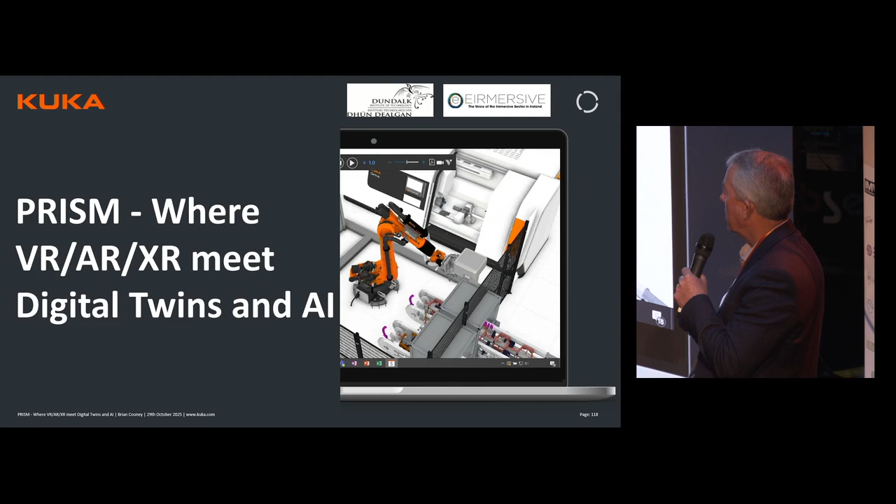So, I'm a local lad, born and bred in Dundalk. In fact, I served my time originally in the building to the left of the studio here in PJ Carroll's tobacco manufacturing company. And then I came to DKIT to study mechanical engineering. I've been in mechanical engineering for 40 years, automation, specifically robotics, for the last 30 years, having set up and ran the robotics business for ABB, and then in 2014, setting up and running for Kuka Robotics.

I'm passionate about manufacturing, and for that reason alone, I sit on a number of boards, including the IBEC Industries Board, the Irish Manufacturing Research Industry Steering Committee, the AMTCE, which is the Advanced Manufacturing Training Centre of Excellence, where I sit on the Board of Governance, and I also sit on the NSAI Robotics Steering Group.

So, a little bit about Kuka. The company is more than 125 years old, so you can imagine it's not 125 years making robots. In fact, it's 1973 when Kuka made the first industrial robot on a commission from Volkswagen. 15,000 people worldwide, more than 50 different countries, 100 different locations. It's about a 4 billion euro company, so it's reasonably large. It's made up of 5 different pillars.

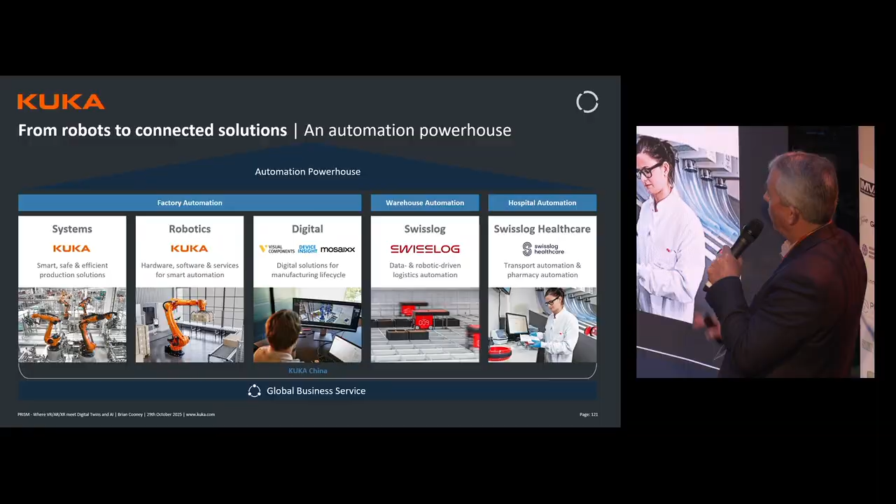One specific pillar we're going to talk about later on, but the robotics pillar is the one that I work for. What we do is we supply the robotics software and hardware to our system integrators, system partners, and machine builders in each of the countries that we operate in. We also have a systems business, but that operates at a very large level. Timmy may already be aware of it because Volvo are a customer of ours, but this is where we will build entire automotive lines or aerospace lines or nuclear systems or modular house building and so on. These are typically systems that run from about 10 million up to several hundred million.

We have the digital pillar, and this is what we're going to talk about in the next series of slides, with visual components, Device Insight, and Mosaixx. And then specifically in warehouse and hospital automation, we have Swisslog. Swisslog do distribution centers, logistics centers, but they also do transportation systems and pharmacy dispensing systems within the hospital environments.

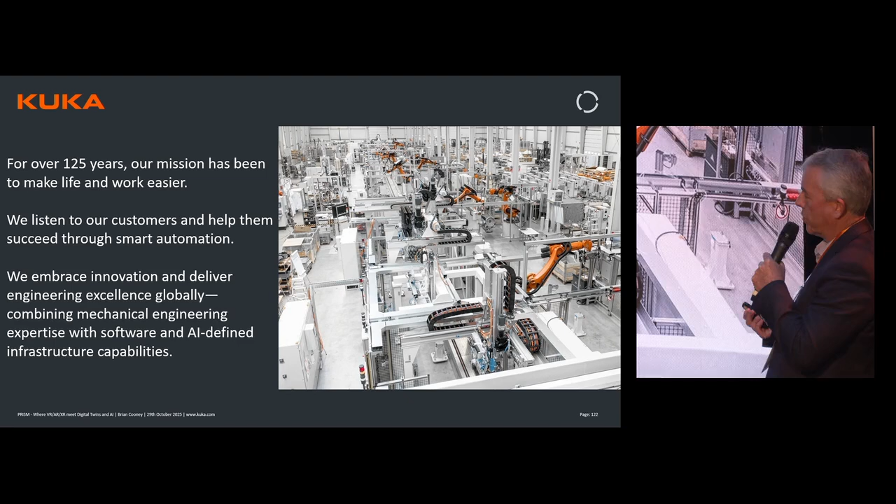As I mentioned, we're over 125 years old, but it's the bottom paragraph that really captures what we do. We embrace innovation and deliver engineering excellence globally, combining mechanical engineering expertise with software and AI-defined infrastructure capabilities. When I joined the company, or even 20, 30 years ago, Kuka would have been known as a mechanical engineering company. Nowadays, it's very much known as a software and AI company with a mechanical element to it.

And this is the start of it. When we talk about our digital sphere, we're talking about the applications around the robot: application software, simulation, our knowledge databases, remote service, device connectors for the various different machines. But a lot of this is platform independent. We have Mosaixx, which is collaborative planning software. It's independent, so we can interface and collaborate with multiple different third-party vendors, the likes of Dassault Systems or Siemens PLM and so on.

Visual components is when we're talking about entire factory design, so digital twins of entire factory layouts and plants. Kuka is when we're talking about Kuka Sim and Kuka Sim Pro, again about either cells or factory layout, or virtual commissioning and offline programming.

And then we have our device insight, which is around the actual operation of the factory. This is where we can digitally connect all the robots and machines. We can pull all the data from them that influences the machines of the future, the robots of the future. It allows us to do predictive maintenance. It allows us to calculate the energy that we're using through the machines and how to improve on that.

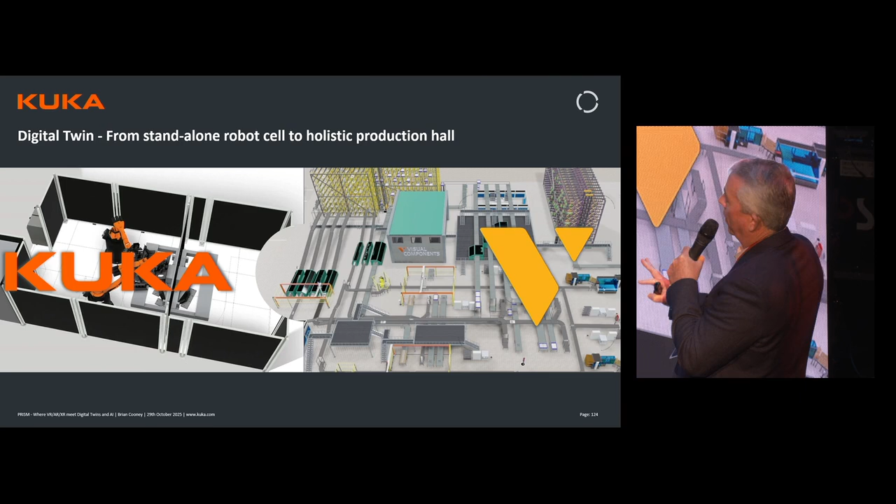Now, when we talk about digital twins specifically, we're talking about the KUKA.Sim and we're talking about cellular type design. So we can take robot cells, we can design them up, and then on the Visual Components side, we can design the entire plant. So we can build those two together, but they are compatible with each other.

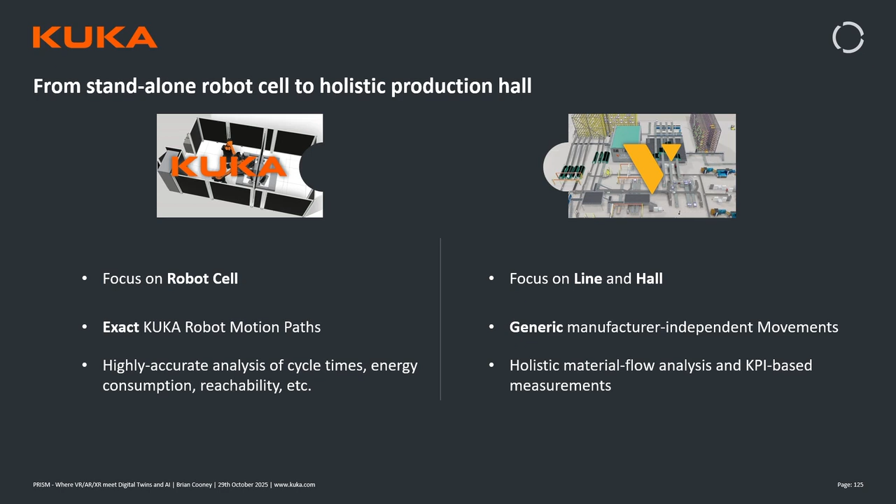The KUKA.Sim side focuses on the robot cell. We can calculate out our exact motion paths. It's very accurate. It's using a virtual controller, so it's not close or thereabouts. It's exactly what you're going to get in the real world. It allows us to calculate the energy consumption, reachability, and so on, the functionality of the cell.

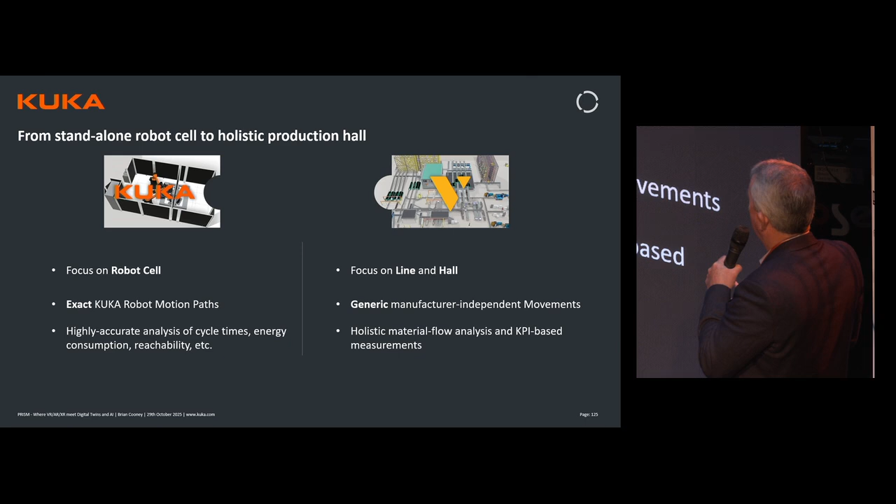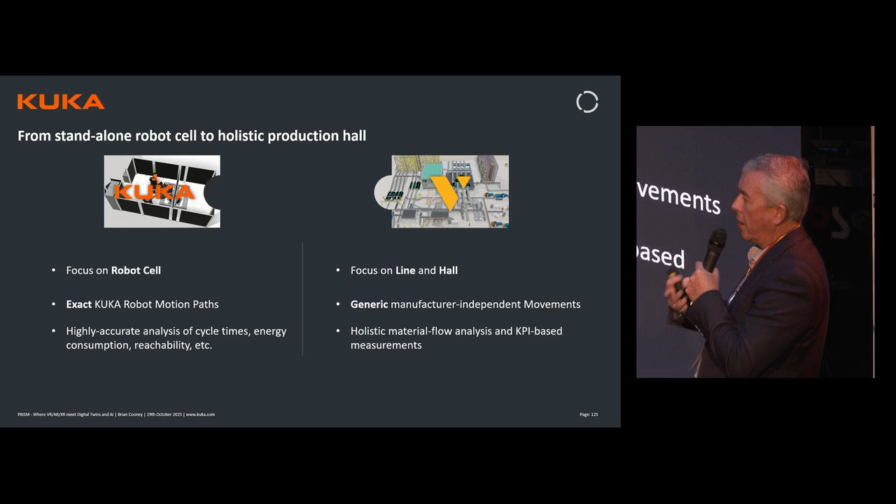The Visual Components allows us to focus on the production hall, the generic manufacturing. So we can pull in other machines. You can pull in injection molding machines, you can pull in presses, conveyors, etc. And we can calculate the times around all of those machines and then allow them to interact with the robot cells as well. So that allows us to have a holistic material flow analysis and KPI-based measurements and targets.

But why? What does it all do? So what it does actually is it allows us to save planning time. So from initial concept through to final design, we can reduce the time that it takes to actually design the concept and build the final solution around it. It allows us to check the feasibility and the viability and verify digitally what the machine is going to look like when it actually hits the factory floor.

It allows us to calculate what a change upstream or downstream will make on the entire process. And eventually, what that means is it drives up revenue and it reduces our costs. If we can take a machine or a plant layout and we can verify it digitally before it's ever cut or before it's ever made into the real world, on an automotive line, we can take 6 months out of the delivery of a line. And that is a huge amount of revenue. And then we're using extended functionality such as modeling, connectivity, arc welding, amongst others.

There are various different toolkits that we use around the digital twins. We have the KUKA.Sim for the 3D simulation and offline programming. We have WorkVisual, which allows us to configure the controllers and the machine data, online connections to the robot controllers. And then we have OfficeLite, which allows us to do the simulation of the real robot controllers and the offline programming and virtual commissioning. So that all allows us to enable a seamless workflow really between the virtual and the real world, your digital twin.

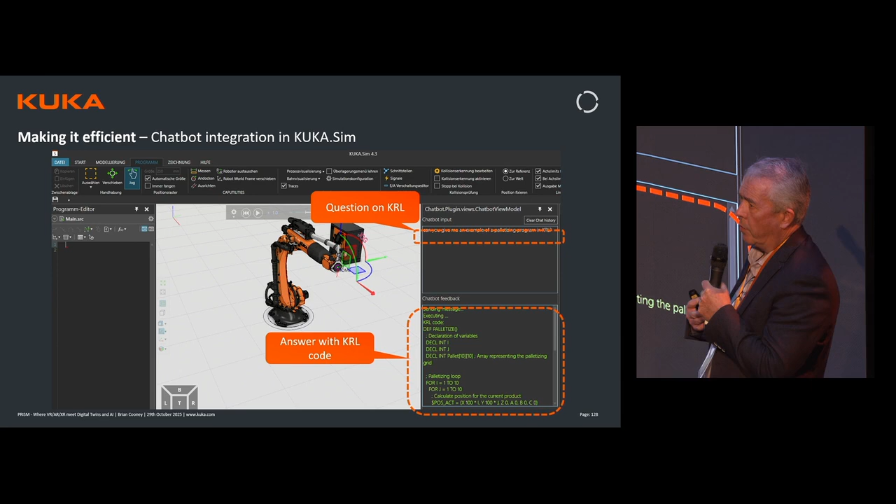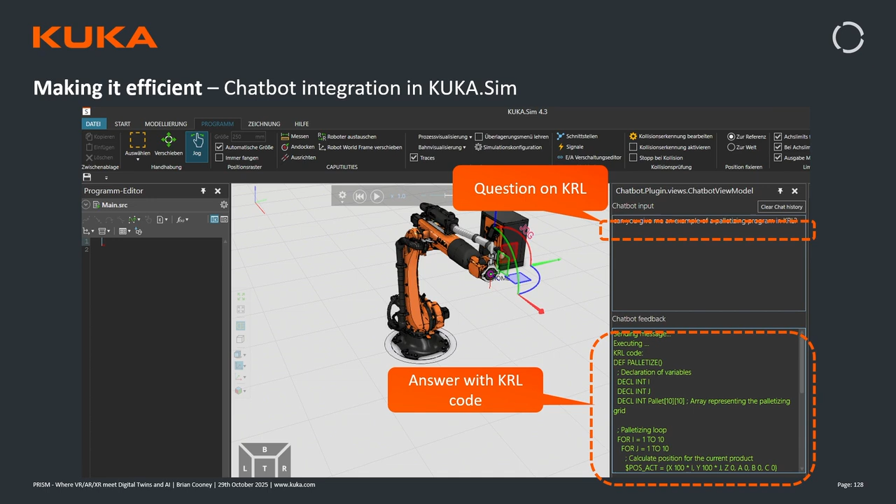If we take the AI element into it, when we're talking about robot programming, you're talking about coding, but we're trying to get away from that. So using AI, we can use chatbot functionalities. So we can tell the robot what we want to do. If it's a very simple application like palletizing, let's say we're building a pallet of boxes of butter, and we want to build a grid layer of 6x3.

We can tell the robot what we want to do. We can give it the dimensions in a chatbot and tell it that we want to do a layer of 6x3. We want to have 6 layers high, and we want to have interleaves between it. And it will generate it. So we're getting to the point of low code, no code programming for robotics.

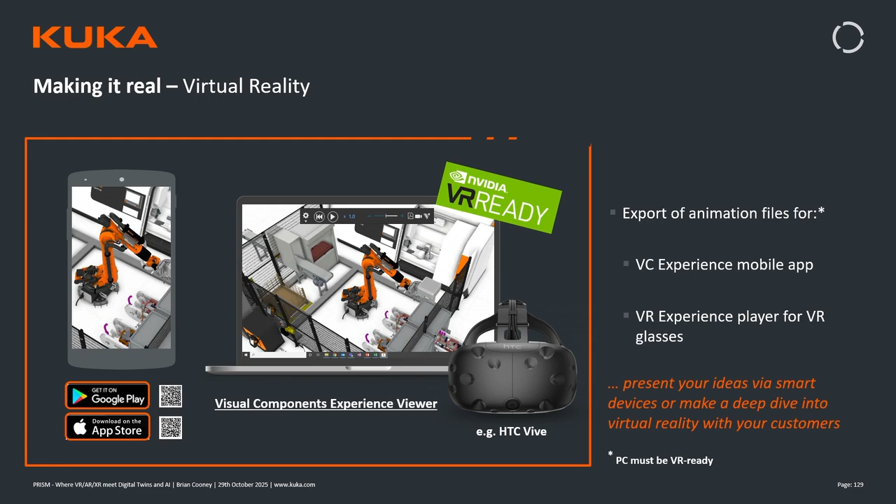We can export it to VR. So again, in terms of a lot of what we've seen already, if you're walking around the factory in the real world, you can see where all the problems exist. If you've already designed it digitally and you can export it to VR, you can now walk around your factory before it gets delivered. You can see exactly where problems might crop up or might already exist.

You can check it for the ergonomics of the machinery that you're building and designing. And you can use it as a tool, because a lot of these lines take a year, 2, 3 years to actually deliver. So you can use it as a training tool for your staff as well. So they can actually virtually walk around like the DAA example. So you can actually walk around the shop floor before it becomes a real shop floor.

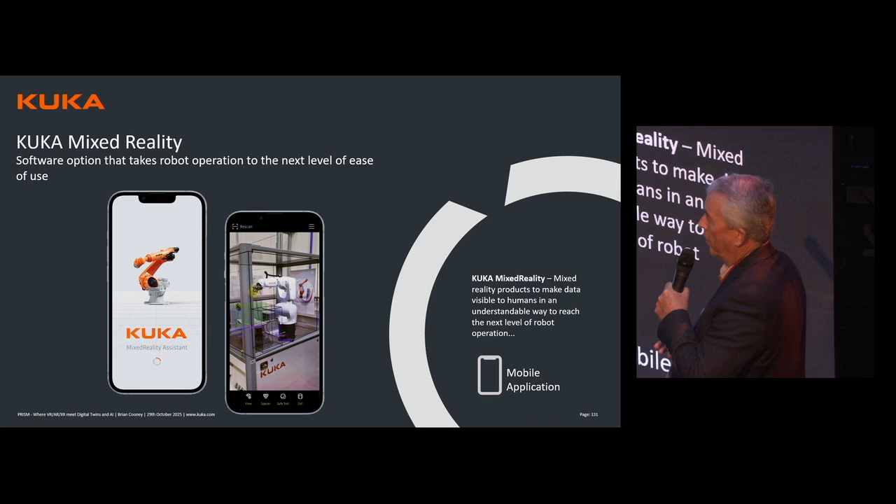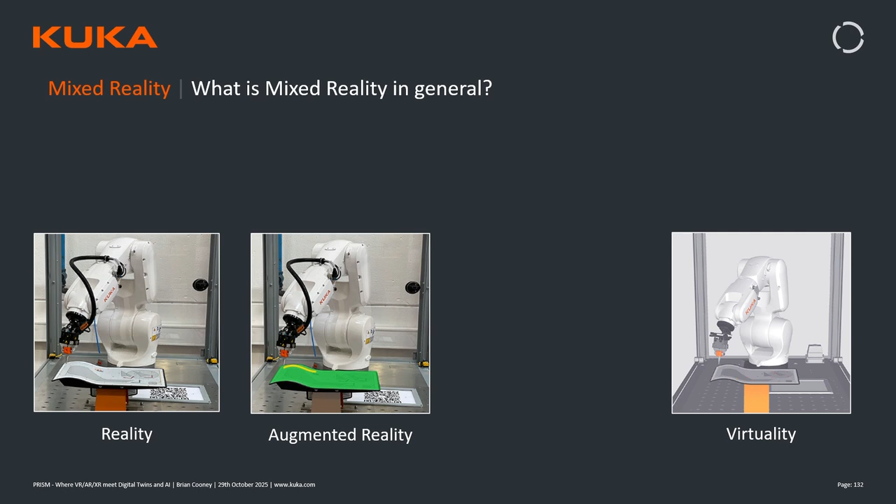And we have mixed reality. So Mark gave a very good, concise description of what mixed reality is, and that effectively covers what I'm saying here as well. So you actually have reality, then you have augmented reality, you have your virtual world, and you have augmented virtual world, which gives us extended and mixed reality.

Now, why would we use that? There are multiple reasons why we would use it, but one reason is around safety. So obviously the safety of the human in the loop is of paramount importance. It's the most important thing with any machine design, but particularly around robotic machine design. And what that allows us to do is to create virtual zones around certain elements of the robot cell, whether it be the tooling or even external components within the robot cell. So it could be the machine that we're interfacing with. It could be an injection molding machine, or it could be a laser marker or whatever.

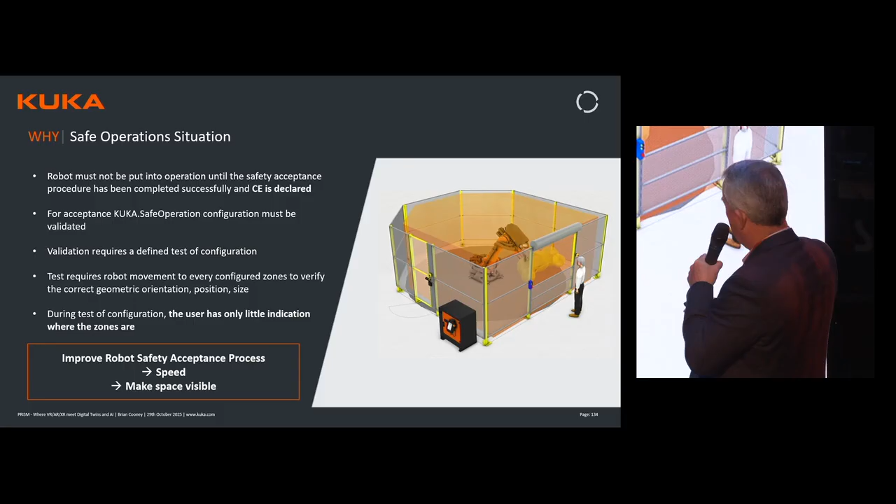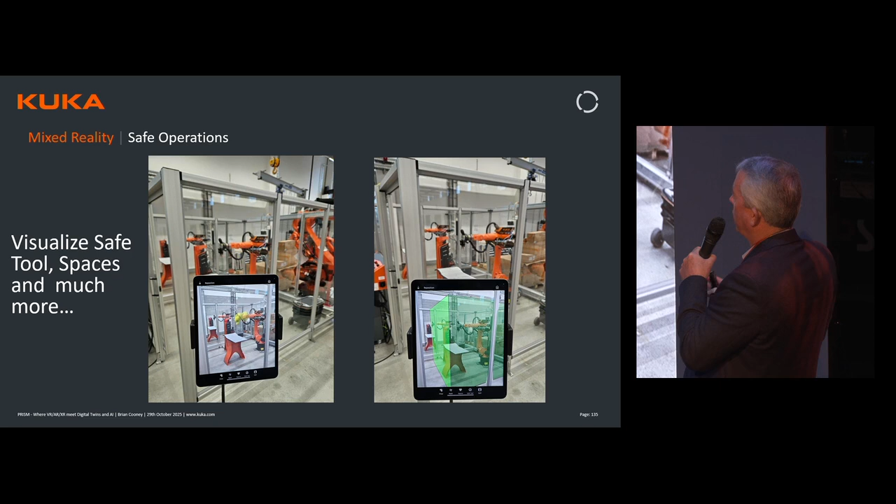But these are all expensive pieces of equipment. We don't want to damage them either. The human takes priority, but we don't want to damage the robot. We don't want to damage the equipment. So we can build all these virtual safety zones around it. And then we can export that into the mixed reality, and we can take it on our handheld devices and walk around the shop floor where we're going to be putting this robot cell. In this case, it's a virtual robot cell until we get the approvals on it, but we can check out all the various different safety elements around that.

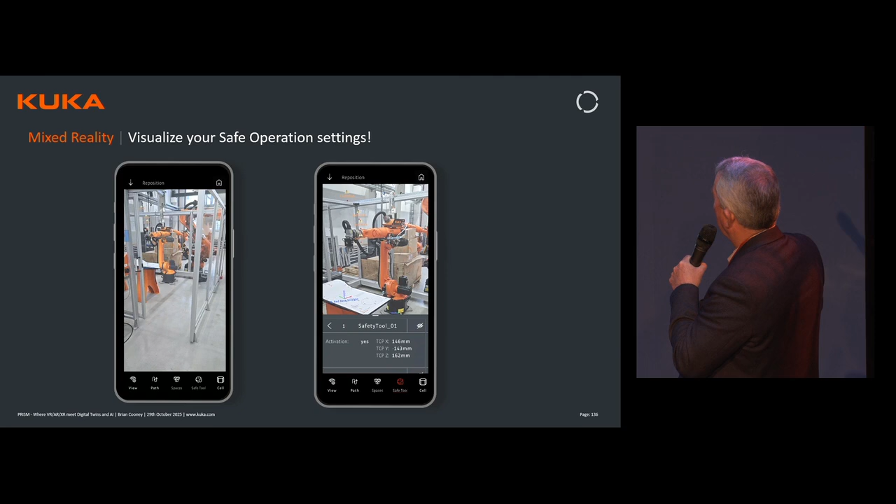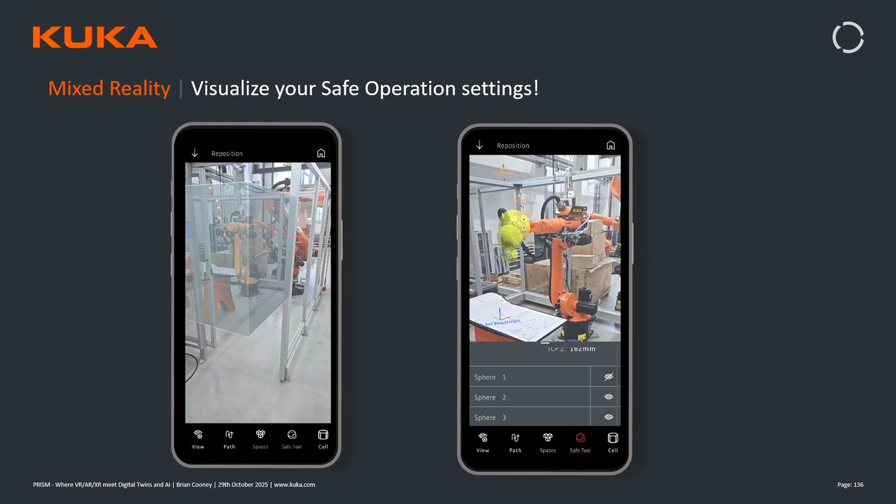This is just an example of when it's working through it. It's just going through the various codes. You see the various different spheres that are showing on the robots. But these are virtual cells that are being built up. And they're overlaid on the shop floor as you're walking through it.

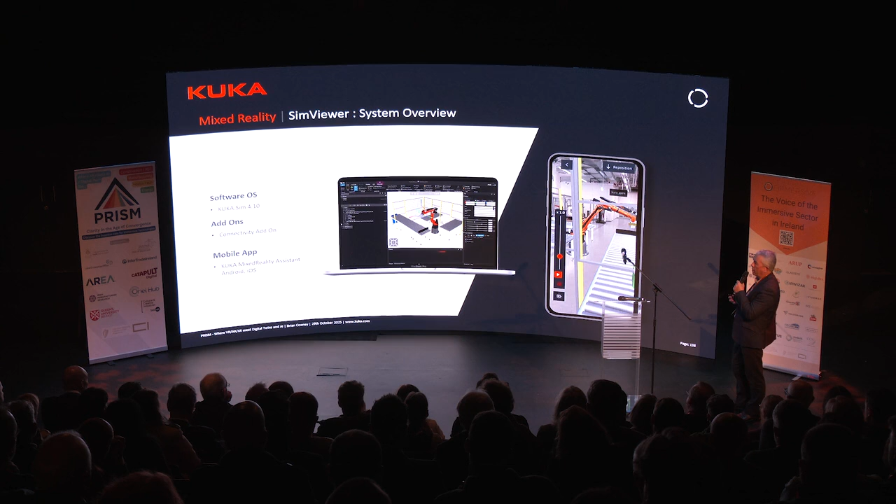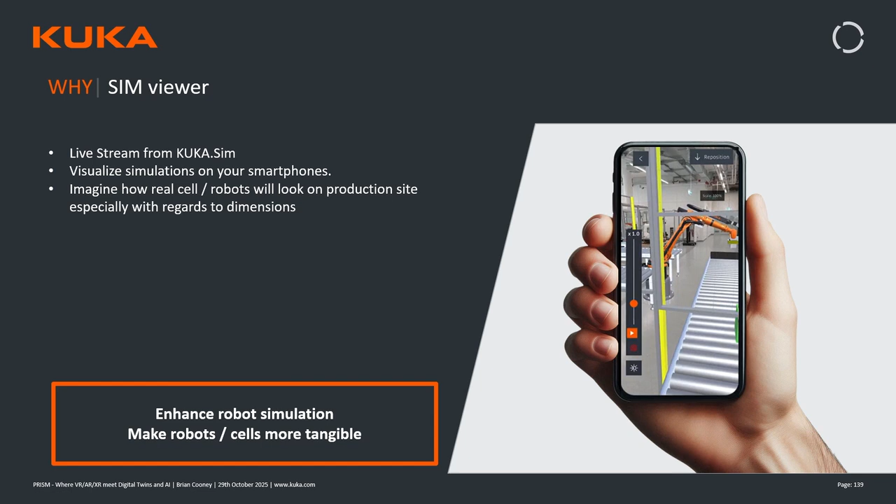You can import any simulations coming from your simulation software package. And again, you can walk down on your shop floor and you can overlay it on the real world. That helps you check for the physical size of the cell, how it's going to run when it's in operation. You can get your operator buy-in. You can do your training, your offline training. And you can do that, as I say, from your handheld devices.

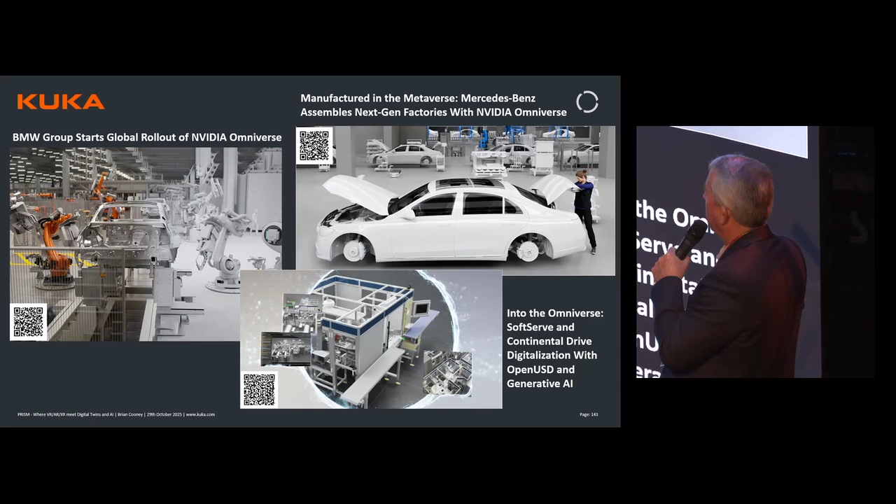So what's next in terms of what we're working on? So if we talk about the NVIDIA Omniverse, there's lots of companies now starting to roll this out. And we're no exception, being able to work with NVIDIA to move forward on our digital offerings. So what that allows us to do is to program and simulate our robots within the NVIDIA Omniverse platform. The operators can monitor and control the robots from anywhere as long as they have an internet connection.

And then you have your virtual training environments within the NVIDIA Omniverse. So that's for your operators and technicians to be able to familiarize themselves and train themselves before the equipment actually arrives on site. So thank you very much.